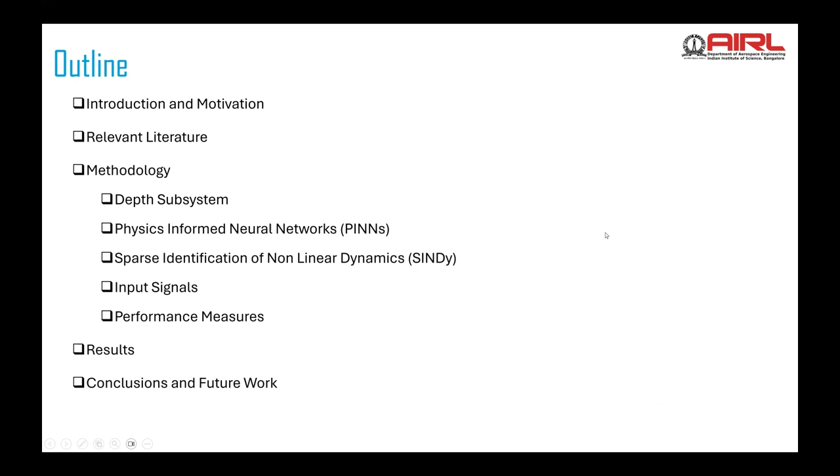Then we describe the input signals and performance measures used in the study. We then glance at the results and conclude the presentation with a few key points and directions for future research.

Autonomous underwater vehicles, or in short, AUVs, have revolutionized ocean exploration. Their ability to perform tasks such as underwater mapping, monitoring, and various operational duties is invaluable. However, accurate dynamic modeling is critical to their successful deployment, particularly in harsh, deep sea environments.

To enhance their design and control, understanding the hydrodynamics of these vehicles is essential. That's where system identification comes into play by helping us develop accurate models based on real world data. Hydrodynamic coefficients are crucial for precise maneuvering of AUVs. Combining traditional methods like computational fluid dynamics with data driven techniques can significantly improve our ability to estimate these coefficients.

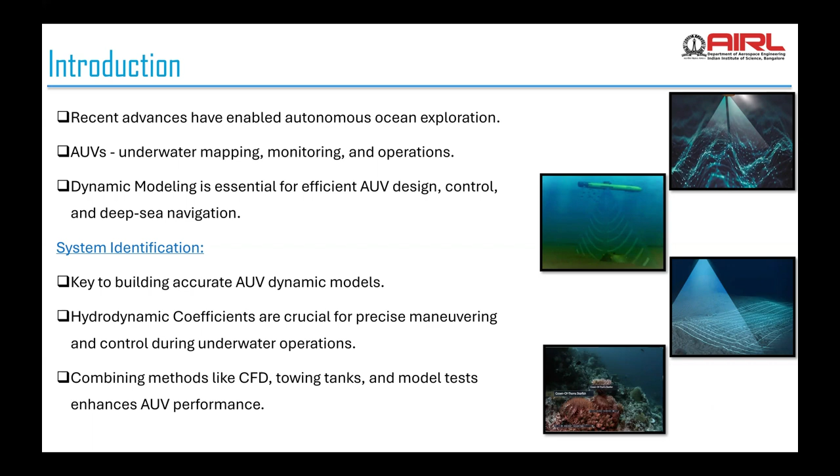Several techniques have been explored in the literature for parameter identification. A few notable works include the optimized unscented Kalman filter, which utilizes gradient descent for recursive tuning but suffers from overparameterization. Another technique uses long short term memory, LSTM neural networks, but these require a large amount of training data.

More recently, a physics informed identification method was proposed using sequential thresholded least squares along with Bayesian optimization. However, these works focus on specific subsystems like the yaw subsystem, leaving gaps in other areas like depth control. That is why this work focuses on system identification, especially in the depth subsystem of AUVs with limited and noisy training data.

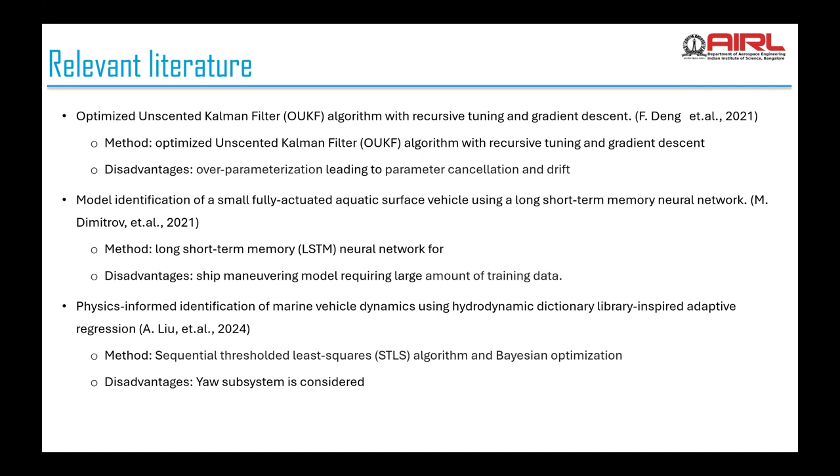In this work, we focus on the depth subsystem of AUVs. The primary variables of interest include pitch angle, depth, speed, and pitch rate. While some of these variables are known, others need to be determined through system identification. For example, moment of inertia is known to us, added mass is known to us. However, the coefficients like Mq, M theta, and M delta are unknown.

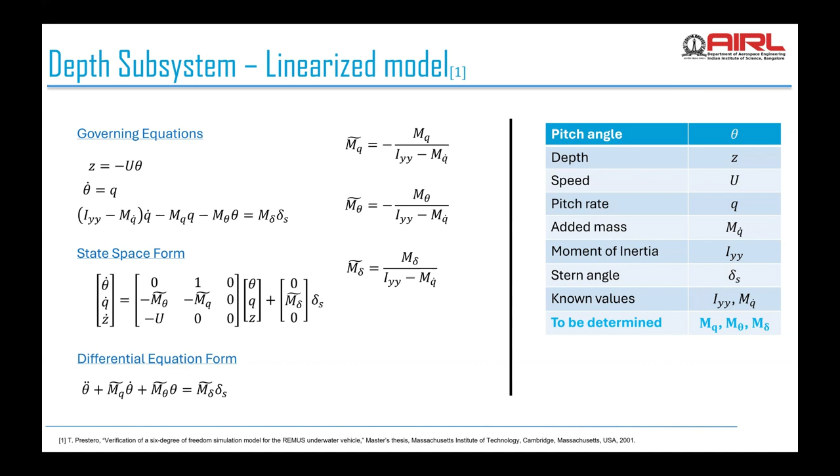The governing equations of the depth subsystem are presented in both differential, which is a second order linear one, and state space forms, laying the foundation for the methods we use to identify unknown parameters.

Physics-informed neural networks have been widely used in simulating physical systems and also in inverse problems for determining unknown parameters in dynamics. Physics-informed neural networks, in short PINNs, have gained popularity in the above fields as they can reliably emulate the dynamics of the system in the presence of limited experimental data by incorporating the governing equations of the system into learning. Hydrodynamic coefficient determination in AUV dynamics is an inverse problem.

The PINN architecture shown here in this figure is used for this problem. It has one input, the time, followed by a few hidden layers, and an output layer with one neuron that predicts the state variable theta. The loss function for PINN here has three components: the ODE part, the initial condition part, and the data part.

The ODE part of the loss function enforces the AUV physics into the function approximation. It is the residual of the ODE itself. The initial condition part of the loss function imposes the initial conditions on PINN output. We assume zero initial conditions for simplicity.

Finally, as this is an inverse problem, data plays an important role in parameter determination. Hence, an additional mean squared error term is added to the loss function to account for the available sensor data. The overall loss function is the sum of these individual components. The PINN parameters and the unknown dynamics coefficients are jointly optimized through gradient descent.

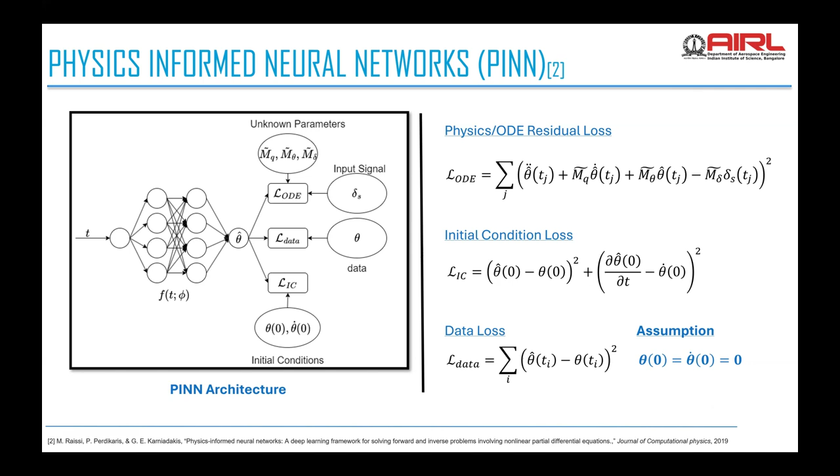Sparse identification of nonlinear dynamics, SINDy, is a data-driven optimization technique to extract the dominant dynamics from noisy measurement data. SINDy formulates the relationship between the state vector and its derivative using regularized linear regression. A library of candidate functions of the state variable, psi, is designed beforehand using existing knowledge of the system. The time derivative of the state variable is then expressed as a linear combination of these candidate functions through coefficients

zeta. The hydrodynamic coefficients determination problem uses the AUV dynamics model, which contains the control signal, the stern angle. The candidate function library psi is modified by including a few columns containing the stern angle. The loss function for SINDy includes the mean square error between the time derivative of the state variables and its linear approximation. Additionally, it contains an L2 regularization term on the coefficient vector.

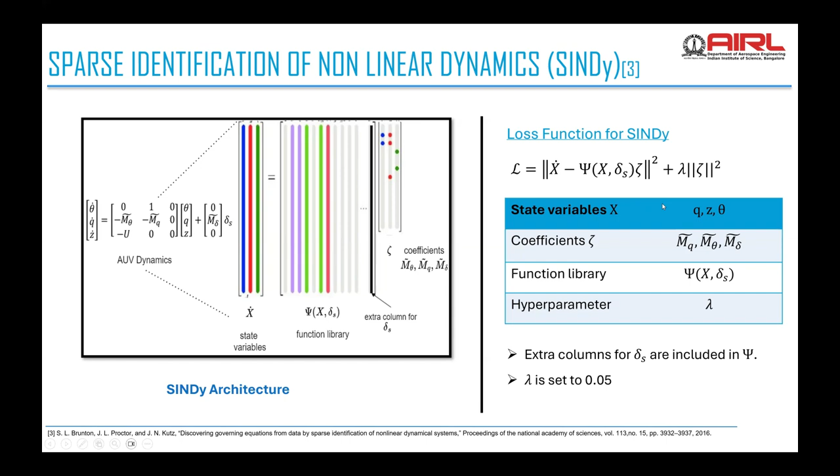The regularization ensures that the recovered coefficients are sparse, and as a result, only the dominant candidate functions survive in the final approximation of the AUV dynamics. The hyperparameter lambda is set to 0.05 and the loss function is optimized using the sequential thresholded least squares algorithm.

In the AUV dynamics, the stern angle represents the input signal. This signal is designed to excite all the modes in the system so that parameters can be identified accurately. We chose two profiles, the multi-step and the sinusoidal. The multi-step profile is a combination of step functions. For the first 0.5 seconds, the stern angle is 0. For the next 3 seconds, it is held at plus 3 degrees.

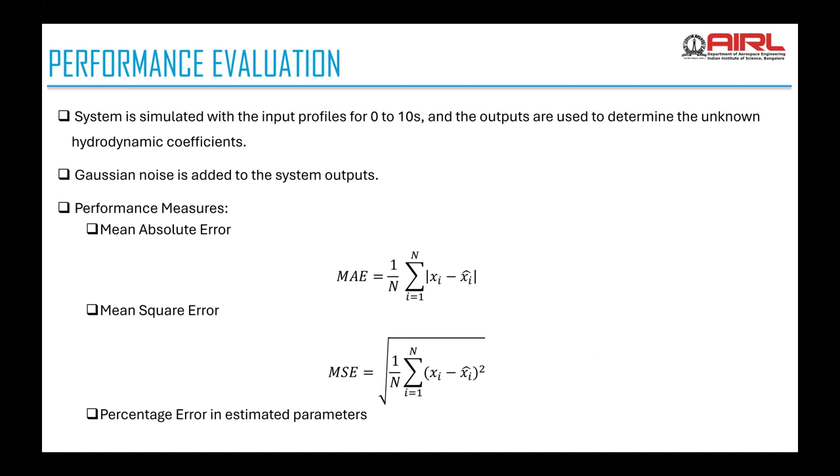Three metrics are used to assess the performance of the proposed methods. The percentage error in the coefficients is used to check the accuracy of the coefficient estimation. The convergence of the resulting state variables is checked using mean absolute error and mean squared error metrics. Two setups are used to assess the performance, the noiseless and the noisy case. In the noiseless scenario, the simulated states are directly used for parametric estimation, whereas in the noisy scenario, random Gaussian noise is added to the simulated states before using them for coefficient determination.

Looking at the results in the noiseless case, SINDy outperformed all the other methods across both input profiles, showing improvements of several orders of magnitude in percentage error, MAE and MSE. This demonstrates that SINDy is well suited for systems where noise is not a significant factor and the data is relatively clean.

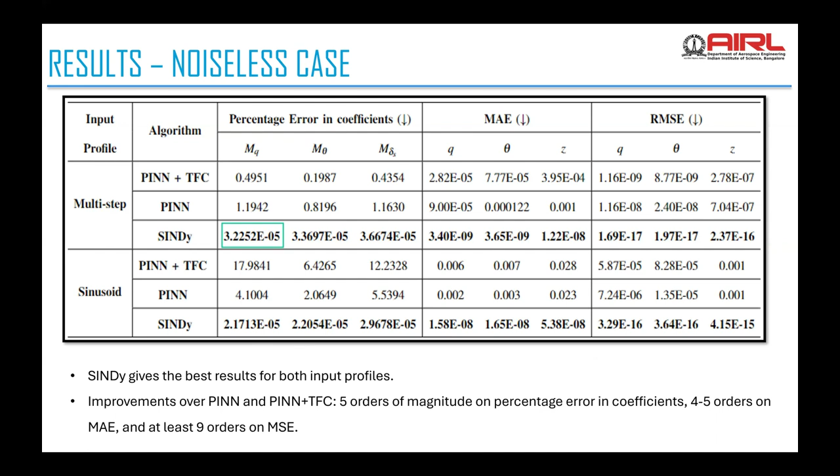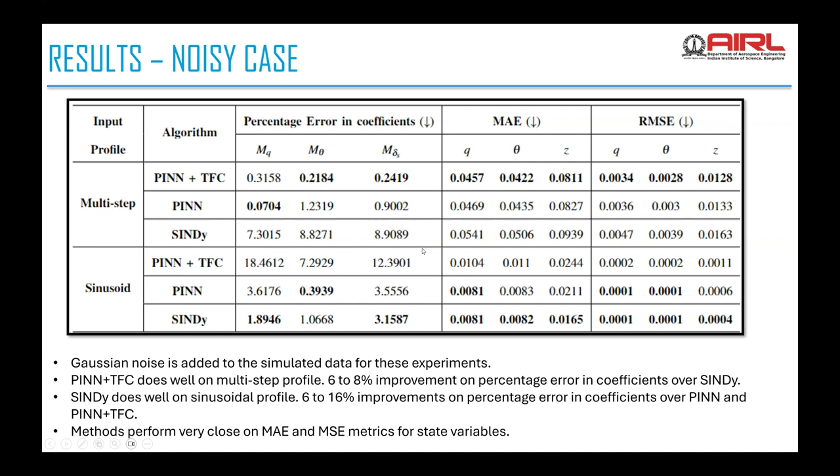Now, when Gaussian noise is added, we see a shift in performance. PINN combined with theory of functional connections performs better on the multi-step input, achieving a 6 to 8% improvement over SINDy. On the other hand, SINDy still performs well on the sinusoidal input, with improvements of 6 to 16% over PINN and PINN with TFC. Overall, while noise introduces challenges, both methods show competitive performance in capturing the AUV dynamics. And we see that in the table we have highlighted multiple places. That shows that we can choose the estimated parameters from either PINN or from SINDy.

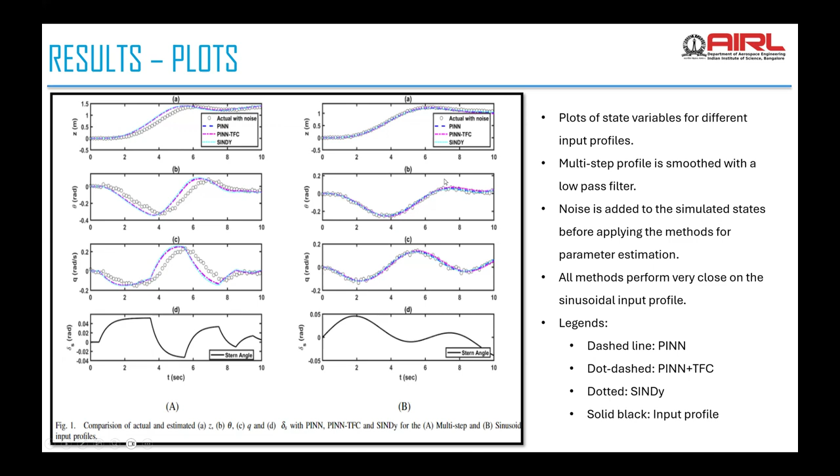Here we have the state variable plots for different input profiles. The input, which is a multi-step profile, is smoothened using a low-pass filter to account for noisy data. As you can see from the plots, all methods perform closely on the sinusoidal input, confirming the robustness of these techniques.

To conclude, this work addresses hydrodynamic parameter identification in the depth subsystem of AUVs for the first time. We found that SINDy generally provides the best results in the noiseless condition, while PINN with TFC performs better under noisy multi-step inputs. Our future work includes extending this analysis to 3 DOF and 6 DOF nonlinear models of AUV dynamics and further optimizing these methods for real-world applications.